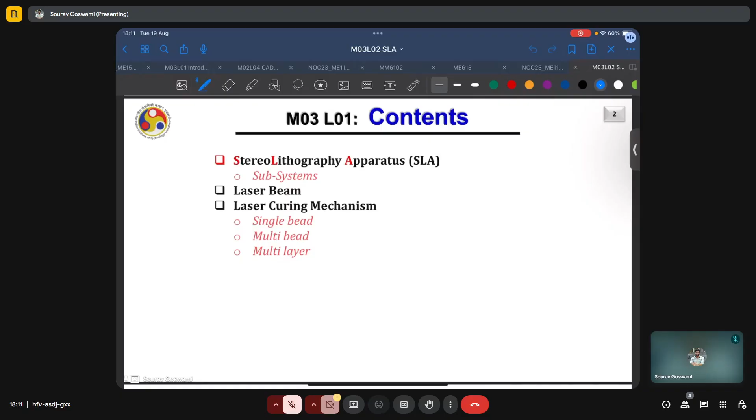The course contents for this week dealt mostly with stereolithography, and in particular with the subsystems of the stereolithography apparatus, on laser beams, lasing mechanisms, and on the mechanism by which such a laser beam cures the resin, which is the liquid feedstock used in stereolithography or SLA systems. We looked at the working principles of single bead curing, multi bead curing, and were very briefly introduced to multi layer curing.

Over the past few weeks, we have been discussing the fundamentals of additive manufacturing. We looked at the definition of the process, what are some of the typical processes, and the categories into which all such additive processes have been classified.

We looked at some basic computer-aided process planning steps, which concern the pre-processing part, while we are still at our computer working on our design. If we have a design, we make it suitable for printing by tessellating it, and we find and check for any necessary support structures which may have to be generated along with the build material.

We saw how a 3D model is divided into various slices, and how by the intersection of the tessellated object with these slicing layers, the contours are generated and how these contours are filled. We also looked at some of the considerations and strategies to fill these contours.

Now, for I think the remainder of the course, we will actually be dealing with actual 3D printing processes which are already commercialized and put to use for commercial manufacturing as well as R&D purposes.

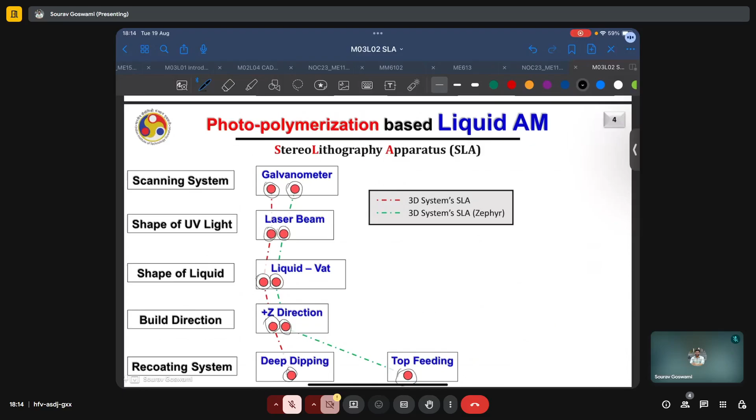Professor Kapil already described this in a video explaining the working of a 3D Systems SLA machine.

Just like any other AM process, with SLA also, the three major blocks of steps are pre-processing, the actual building process, and post-processing.

As I was describing, in the pre-processing step we make our 3D CAD model ingestible by the 3D printing machine. We can slice it directly or indirectly, and we tessellate it with some chosen shape.

We check whether support structures are needed, and if so, where. We choose the material for the support structure in case there is an option to have multiple materials being printed in the same print. If not, we specify the density, the infill structure, or any other distinguishing mechanism, even the color, for the support structure.

Then typically in commercial systems and in SLA, we perform planar slicing. During our discussions, we also looked at some more exotic varieties of slicing, mostly conformal or non-planar slicing, but it's not commonly encountered in SLA systems or DED, in which I work.

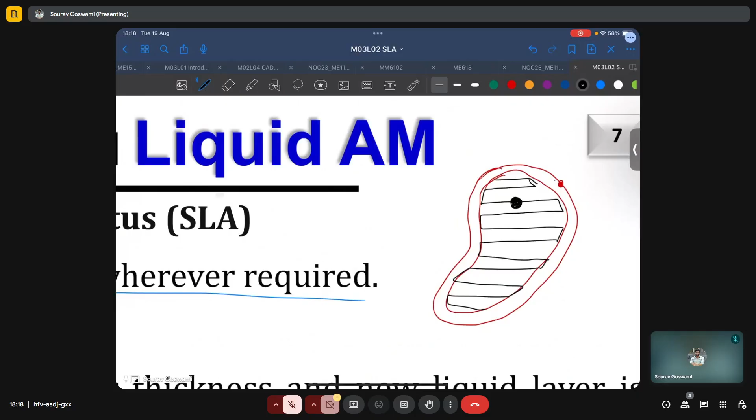After all the layers are made, the table will rise completely, revealing the part. So this layer by layer printing process occurs iteratively. The contours in each layer may be different. In the case of complex geometries, or for very simple prismatic geometries, they may be the same.

However, once all such layers are printed, the table will then rise to reveal the part and allow the liquid to be drained. Once all the liquid has been drained, the built part will be removed from the table.

This removal process, depending on the type of process you're working with, if it is FDM, it can just be removed by hand or by some knife, which is used to separate the printed part from the build plate. Or say if it's a metal part which has been printed using powder bed fusion, then it will need to be separated, say by a wire EDM process, or by some kind of abrasive grinding process.

And further, the support structures have to be carefully removed. Why do we have to take care removing the support structure when we know that the support is a sacrificial material? That is because while the support is indeed sacrificial, our built part is not. And since the support structure is connected to the build part, there may be cases when the support does not really project onto the build plate itself, but from one surface of the build to the other surface of the build.

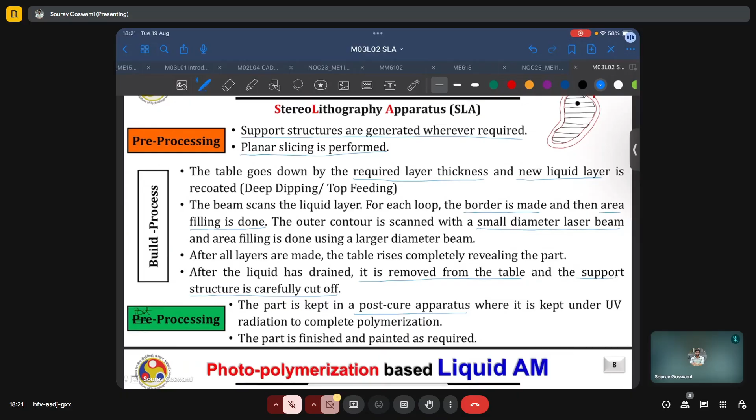Now, in the post processing step, the part is kept in a post cure apparatus, typically something like a UV chamber, where it is kept under UV radiation for complete polymerization. This can take anywhere from say 30 minutes to a couple of hours, depending on the build size, the intensity of the laser, and other factors. And finally, once the part finishes curing, it is finished, taken out, and may even be further painted if required.

Here we have a brief summary of some of the advantages and limitations of the stereolithography process.

It is among the fastest and most accurate of all processes. The reason for the great speeds are because of the tiny moving parts, including the scanning system, which is made up of galvanometers. Galvanometers, as we are aware, consist of a pair of light mirrors which are mounted onto motors. And because of the very low inertia of these mirrors, the motors are able to rotate very quickly and scan the print area with the laser beam at great speeds, typically at the order of 10 meters per second.

Or even more. And it is accurate for a couple of reasons. One is because of the fine size of the laser spot which is used in this process. Second, because since it was the first 3D printing system to be commercialized and developed, a lot of research and a lot of effort have gone into perfecting this process. And thus, for most available resins, we already have a set of well researched and well tested optimum operating parameters and strategies, the combination of which leads to very good parts with great accuracy and tolerances.

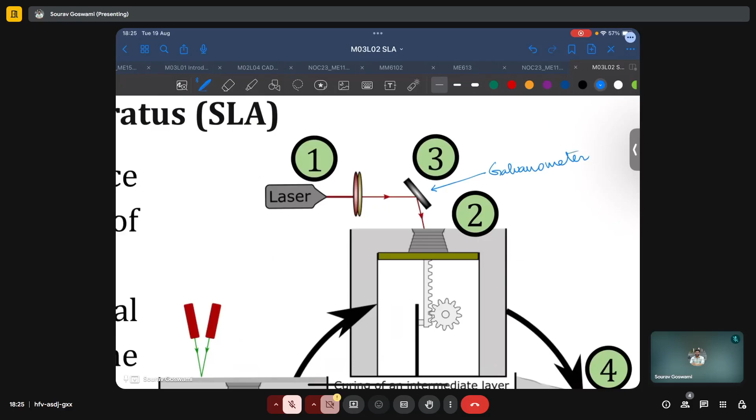So this is just one galvanometer, but as we'll see maybe in the next session, there's actually a pair of them. Galvanometers have a very low inertia, which accounts for the very high speeds.

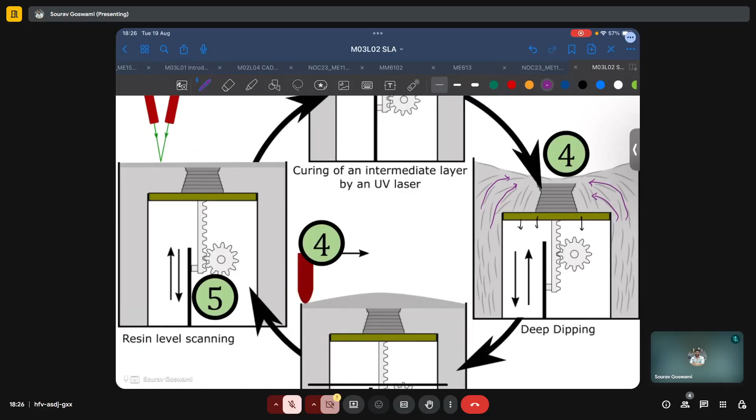It may also be seen to bulge on top of the part, and to ensure that there is only a uniform layer of required thickness on top, we use something called a Doctor Blade to scrape off the excess material, leaving only the required height or required layer of resin on top. Then this process continues, and the next layer is scanned, and so on.

Professor Kapil also discussed some basics of the lasing process. Laser, as we are aware, stands for light amplification by stimulated emission of radiation. Light is any electromagnetic radiation which has the dual nature of waves and particles, and if you're talking about the particle nature of light, then the quantized light particle is called a photon.

All types of electromagnetic radiation travel at the same speed in vacuum, but where they differ is in the frequency and wavelength of radiation. And because of this difference in wavelength, all different types of electromagnetic radiations interact with materials differently.

If I have to give an example from additive manufacturing, we know that for ceramics the suitable wavelength is often of the order of 10 micrometers or so for laser. Typically this will be of the CO2 laser type. For say regular Fe, Ni or Ti based alloys, lasers with wavelength of the order of 1 micrometer, some 976 nanometer or so, are suitable.

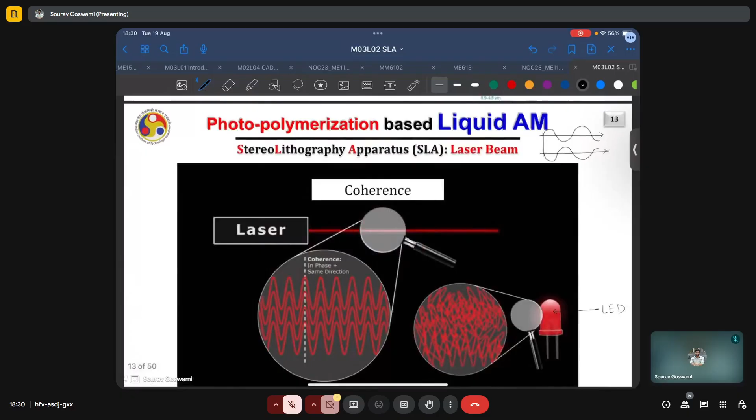So to summarize again, laser has the property of being coherent and being monochromatic.

We'll not talk about the mechanism of laser generation. Professor Kapil has already discussed it. Sorry about that. Yeah.

But we'll take a minute to discuss these transverse electromagnetic modes. There are two modes of the laser beam, one being the longitudinal, which we are familiar with from the analysis of vibration, where we describe the modes of vibration of any string or rod or similar example, and second, we have the transverse mode.

The longitudinal and transverse modes are independent of each other, because this longitudinal length L of a resonator will typically be much larger than the transverse dimension. We can have various transverse electromagnetic modes, which essentially describe the shape of energy distribution in the beam cross section.

This is denoted by the subscripts x and y. X denotes the number of non-illuminated regions along the x-axis, and y does the same for the y-axis.

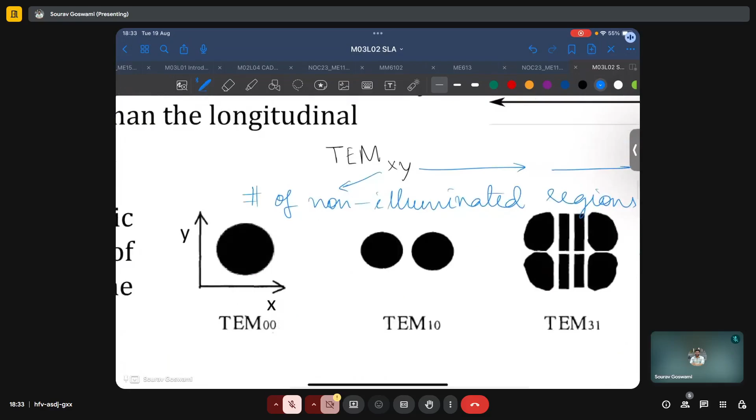If we have a TEM10 type of mode, then we can see that along the x direction there is this one region of non-illumination.

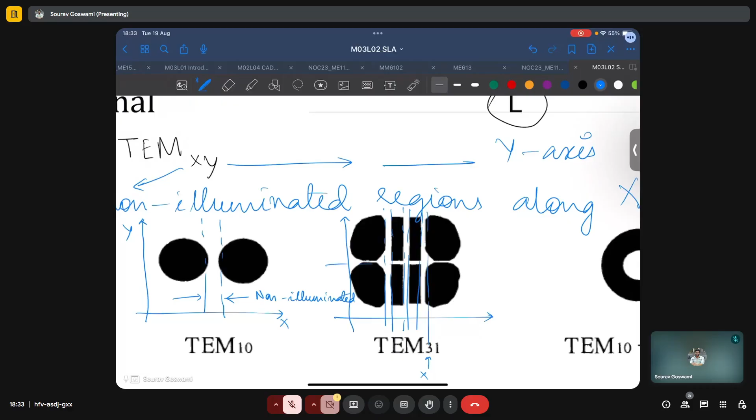Similarly, for the case of TEM31, we can observe that along the x axis there are three regions which are non-illuminated, and along the y direction there is one region which is not illuminated, leading to this beam shape.

And of course we can combine any number of them to come up with new beam shapes depending on the end application, such as a ring or donut shaped laser beam, which is made from a combination of TEM10 and TEM01.

Similarly, we can combine different modes to come up with a top hat ring, as we have here, and other shapes. The parts printed by these different laser profiles can have very different properties.

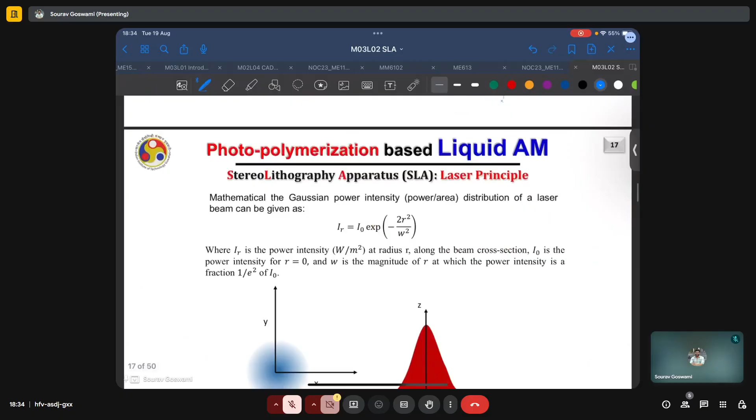However, what we're interested in is how this laser energy is distributed, and how when this laser shines over a layer of liquid resin, it will interact with the resin and lead to curing of the part.

One of the most commonly encountered representations of laser power intensity is the Gaussian intensity distribution. At any radial distance r, the intensity IR equals I naught into e power minus 2r squared by w squared.

Here IR is the power intensity at a radial distance r, with units of watt per meter square. I naught is the power intensity at the very center, that is at r equal to 0. And W is the value of r at which the power intensity drops to 1 by e square of I naught.

Another name for this Gaussian distribution is the bell curve distribution, so some of you might be more familiar with that, or the normal distribution.

To calculate the total power contained within the Gaussian beam, we can do a simple integration step. Starting with a ring of laser at a particular radial distance r, with thickness dr, we can find the power in the strip to be IR times 2 pi r dr, where 2 pi r dr is the area of this ring.

So this is just the area of this ring. To find the total power, we can integrate this elemental power starting from r equal to 0 going till the end of this radial distance. But what is that limit? As we know, for a bell curve distribution, while visually it might appear that the distribution is ending at some finite distance, what we know is that essentially this distribution extends till infinity in both directions. And so the limit of this integral also goes from 0 to infinity because the laser ray is actually spreading out till infinity.

And thus we can come up with an expression for the intensity at a radial distance of r given by I(r) equals 2P by pi w squared, e to the power minus 2r squared by w squared.

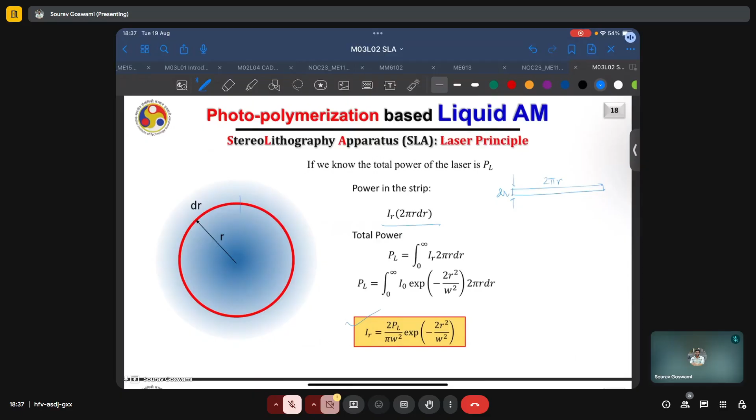The laser beam after coming out of the lasing cavity is highly collimated. Collimated as in it is parallel, it is neither converging nor diverging, and its diameter does not really change much. However, that is for the very ideal case. In the more practical setting, the laser beam will diverge to a very small extent, and this slight divergence in the laser beam is captured by the beam quality parameter BPP. It is quantified in the units of mrad, and there's a unit definition.

So a 1 millimeter diameter beam will have a diameter of 1 meter after traveling a distance of 1 kilometer. Then its divergence is quantified as 1 mrad. However, there might be systems where the beam is further focused using other focusing lenses such as f-theta lenses, as we'll also encounter in our discussions, and then the scenario will of course be different.

There's the concept of waist radius. So during 3D printing, when we say that we are focusing our laser at a particular height, whether that is on the substrate or some pre-deposited layer or at some specified distance, it's never really this set of rays coming and closing in on a point, joining at some point. What actually happens is the laser beams will converge and diverge, and this minimum thickness of the laser beam is referred to as the waist.

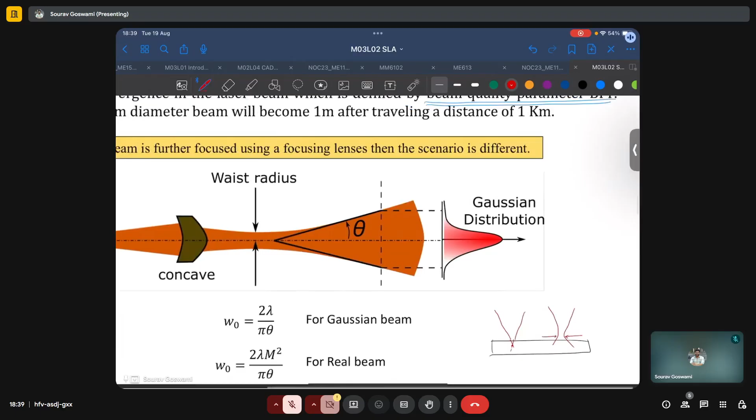It is quantified in terms of the waist radius. For an ideally Gaussian beam, the waist radius is equal to 2 lambda by pi theta, where theta is the divergence angle as shown in the figure here. For a real beam, however, it will further be multiplied by a factor of m squared to account for the beam quality.

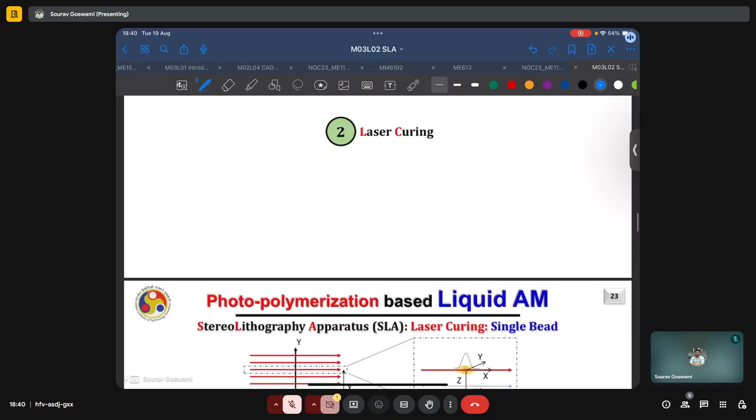So, some numerical examples were already discussed by Professor Kapil in class. We'll also discuss a few numerical examples of our own, which will be useful for solving the assignment problems.

Next, we talk about the mathematics of the stereolithographic process, and we'll be dealing with a lot of equations here. However, they are well derived and well described by Professor Kapil, so we should not run into any issues. We'll just briefly recall some of the few important ones, which will be useful for our problem solving exercise later on today.

So, say we are scanning a region, and for one particular bead, this bell curve shows the intensity of the laser profile. The directions of the x and y axis are shown. Scanning is happening along the x direction, y is the lateral direction, and the z direction is pointing inwards. So this is a left-handed coordinate system, and we are scanning along a length of 2L from a time t1 to t2.

So the intensity of the laser beam spot in units of watt per meter square on the top surface of the resin, so we have set z equal to 0, can be defined as I equals 2P naught by pi omega naught squared, e to the power minus 2r squared by omega naught squared. Here omega naught is actually the beam radius.

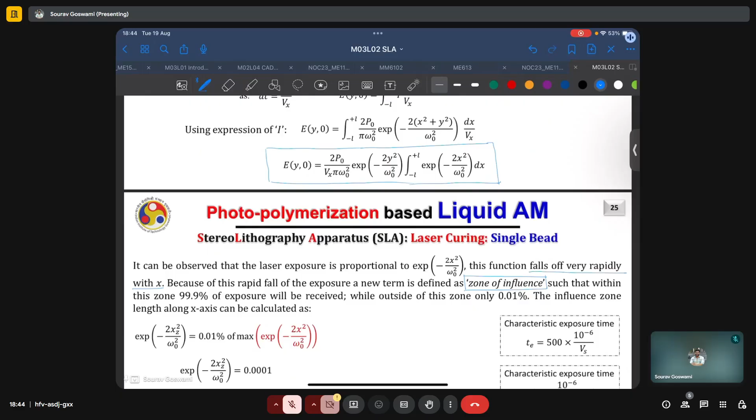a term called the zone of influence is defined. This zone of influence is the zone where 99.9% of the energy exposure will be received. Essentially, almost all the energy of the laser beam is contained within this small zone of influence. For strictly theoretical purposes, it is 99.9%, whereas the remaining 0.1% will be outside the zone of influence.

And thus we can calculate what will be the extent of this zone, and it comes out to be 2.146 omega naught, or 99.9% of all the laser energy will fall within just 2.146 times the beam radius. For an SLA system, a typical beam spot radius length scale can be taken to be 100 micrometers, and thus the limit of the influencing zone can be seen to be from minus 214.6 micrometers to 214.6 micrometers, or approximately just 500 micrometers.

So 99.9% of the energy is contained within this zone only.

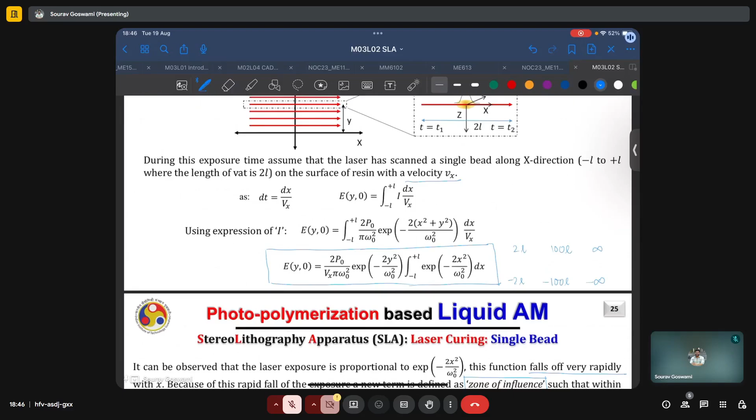And essentially, the reason for doing this exercise is, now that we see that all of the energy is only contained within some 500 microns of a local region, it does not really matter whether we are integrating from minus L to L, or minus 2L to 2L, or minus say 100L to 100L, or minus infinity to infinity, because the amount of error will be very small. And out of this convenience, we simply take the limit of integration from minus infinity to plus infinity, which allows us to come up with a closed form solution for this integration.

And so our equation is suitably modified. Now the energy distribution in the y direction for a given x value and on the surface with z equal to 0 now becomes equal to 2p naught by vx pi omega naught square e power minus 2y square by omega naught square, integral now from minus infinity to plus infinity of e power minus 2x square by omega naught square dx. Recollect that the limit of this integral was earlier from minus L to plus L, because we have defined that the laser is only scanning along this distance.

Now with some further suitable substitutions, this can be simplified to give us the final relationship. The energy distribution in the y direction for a given x and on the surface is equal to under root 2 by pi, p naught by vx omega naught, e power minus 2y square by omega naught square.

But this was just at the surface. What happens inside? Because as we know, for the material to be cured, the laser has to penetrate into the bulk of the material. So when the laser beam strikes the resin surface, some of its energy will get absorbed, some of it will get transmitted, and some of it will get reflected.

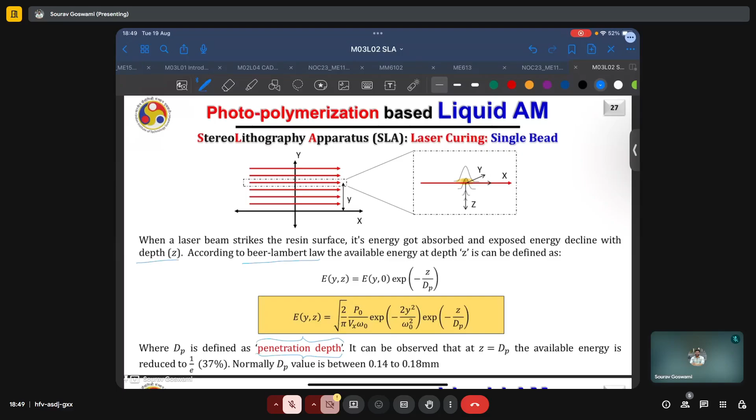How is dp defined? Again, mathematically it is defined as the limit at which the energy intensity decreases to about 1 by e, or 37% of the incident radiation. And we also have some numbers here. So typically this penetration depth value will lie between 0.14 to 0.18 mm, or typically of the order of 0.2 mm.

Thus our final equation, now for the energy distribution at any y and z at a given x, is now under root 2 by pi, p naught by vx into omega naught, e power minus 2y square by omega naught square, e power minus z by dp.

Now some comparison of scales here. Let us say we are working with an SLA process and have some optimized parameters to build parts. But say one day the idea strikes us that we want to save on build time, to build really fast, and our machine has hardware capable of very high scanning speeds. So say you want to increase the scanning speed to 2x, 3x, or even 10x, the rationale being that scanning faster will save print time and build faster. But what is the physical consideration that actually dictates the maximum speed you can take? Or can you just keep increasing the speed monotonically to any arbitrarily high value? Is it only limited by the hardware?

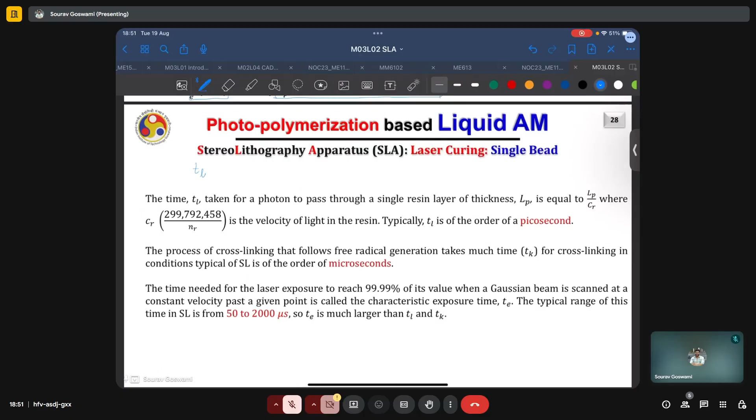For that, here we have some time scales. The first time scale, TL, is the time taken for a single photon to pass through a single resin layer of given thickness LP. This time will equal the layer thickness of resin LP divided by CR, where CR is the velocity of light in this given resin. Its typical order is of picoseconds, 10 to the power minus 12 seconds. This is the amount of time taken by a single photon to pass through a single resin layer of some given thickness.

As we discussed last week, the process of polymerization involves cross-linking that follows free radical generation. The time for this cross-linking process, in conditions typical of stereolithography and for the typical resins used, is typically of the order of microseconds. This is given by Tk, so Tk is of the order of microseconds, or 10 to the power minus 6 seconds.

Now, the time needed for the laser exposure to reach 99.99% of its value when a Gaussian beam is scanned at constant velocity past a given point is called the characteristic exposure time, TE. The typical range of this time in SLA, stereolithography, ranges anywhere from 50 to 2000 microseconds.

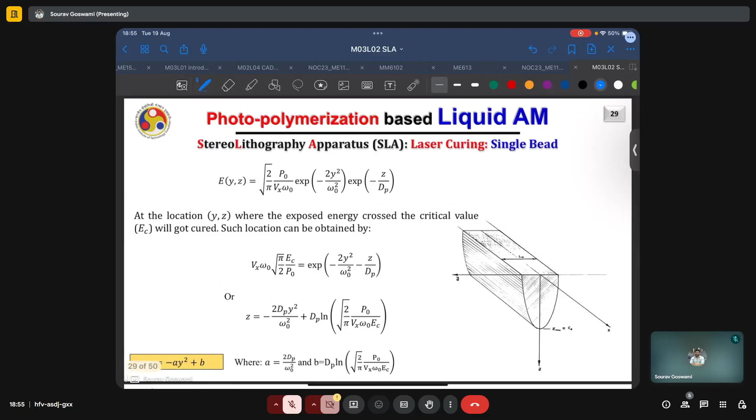How do we get all those locations? The location where the energy intensity is just equal to this critical intensity will give me the perimeter or shape of this cured region, since everywhere inside it the energy intensity will be equal to or more than this critical energy. To do this, we simply equate the expression of the energy with the critical value, and this gives us the expression for z at a given x in terms of y. Z equals minus 2 dp y squared by omega naught squared, plus dp ln under root 2 by pi, p naught by vx omega naught ec. This is of the form z equals minus a y squared plus b.

As we are aware, this is the equation of a parabola. If our leading coefficient were positive, this parabola would be convex downwards... for a negative leading coefficient, it will be convex upwards for a z direction pointing upwards. In our case the z direction itself points downwards, and so our parabola looks like this, which is the expected shape of a cured bead.

Further, the maximum exposure, which happens right below the center point, corresponding to the deepest location of the cured bead, or in some other processes, corresponding to the deepest location of the melt pool, can be given by Emax equals under root 2 by pi, p naught by Vx omega naught.

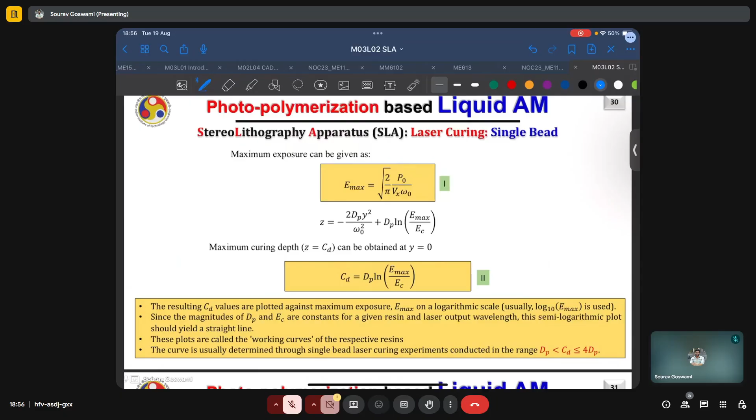And the maximum curing depth at this maximum exposure can be obtained at y equal to 0, as we just saw. At this point, we have both x and y equal to 0. Sorry, at some particular x, we have y equal to 0. And if we just substitute that in our equation for the depth, this maximum depth can be obtained as CD, maximum curing depth, equals penetration depth into ln of Emax by Ec.

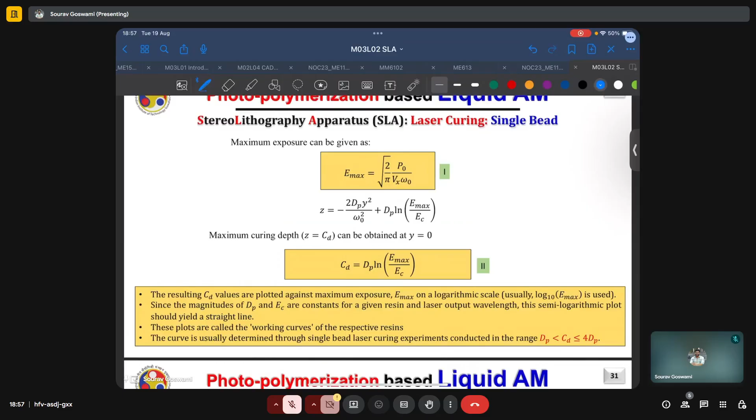Here are a few important observations about these things. The resulting curing depth values are plotted against the maximum exposure Emax values on a logarithmic scale, typically log 10 Emax. Since the magnitudes of dp and Ec are constant for a given resin and for a given wavelength of laser, this semi-logarithmic plot should yield a straight line.

And these straight line curves for various parameter combinations are called working curves and are typically used or referred to directly when working with an SLA system instead of calculating them always by ourselves. So for the given standard resins that you use and for the wavelength of your system, you will be provided with a booklet containing these working curves, which you can refer to when trying to print a part.

And this curve is usually experimentally determined through single bead laser curing experiments conducted in the range dp less than CD less than or equal to 4 dp. The reason for this is because in this region, the Emax versus CD curve is a straight line and shows linear behavior. Beyond this region, it can have a super logarithmic or sub logarithmic behavior, as we'll just see now.

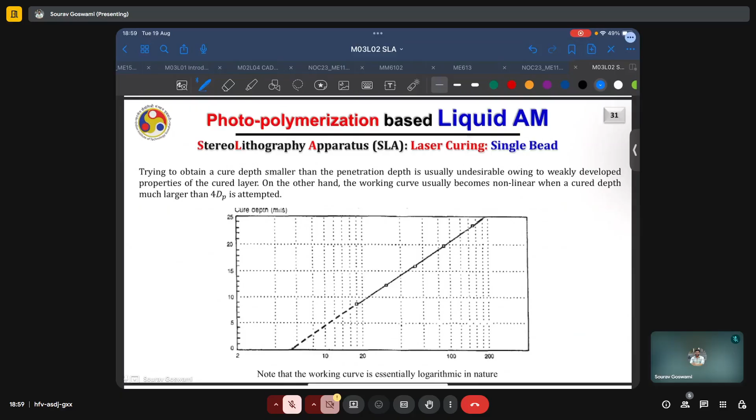An example curve is shown on the right here, which shows super logarithmic behavior. If we were to just extrapolate this curve, we would have expected this straight line nature to continue, but instead we see that the slope has become much steeper. Since the plot is already semi-logarithmic, and this given curve is now even steeper than a logarithmic curve, its behavior is called super logarithmic.

And there are two possible mechanisms which have been proposed in the literature to explain such a behavior. One is optical bleaching, and the second is optical self-focusing.

What happens in optical bleaching? The partially solidified part may become transparent for the laser, and hence, because of this transparency, it is now allowing a greater penetration of the laser into the system. As we know, typically it would have been controlled by Beer-Lambert's law, but now that it has become transparent to the incident laser radiation, the laser can now penetrate to a far greater depth.

But what is this depth? It is just the slope of this working curve, and if this depth increases, there will be an increase in positive curvature of the working curve, and we'll observe this super logarithmic behavior.

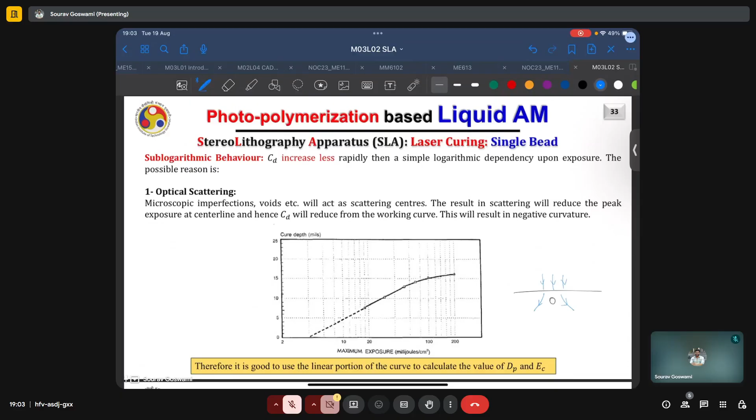So, say in your layer of resin you have a void or an air bubble or any other such microscopic imperfection, which is now scattering the incident radiation away from the center. The resultant scattering will then reduce the peak exposure at the center line, thereby reducing CD, and this will result in a decrease in curvature or sublogarithmic behavior.

Now we already saw the expressions for the maximum exposure and the maximum depth of penetration. What about the width? The maximum width can be obtained at z equal to 0, and this is given by Cw equals omega naught into under root 2 CD by dP.

A few observations about the maximum width of the bead. It is directly proportional to the laser spot diameter, so larger the laser spot, larger the bead width. It is proportional to the square root of the ratio of the cure depth to the resin penetration depth.

And again, if you are working within the linear portion of the curve, we can obtain some bound on this maximum width. In the linear portion of the curve, where CD is between dP and 4 dP, the maximum width will also lie within under root 1 by 2 times twice omega naught to less than root 2 times twice omega naught. Just to recollect, omega naught being the waist radius of the laser beam.

Further, we can come up with expressions for the laser scanning velocity itself in terms of the other parameters. Vx is equal to under root 2 by pi, p naught by omega naught, 1 by e critical, e power minus CD by dP.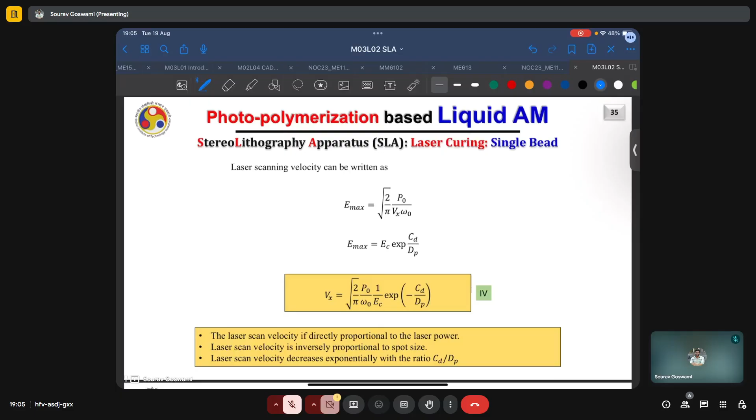Physically what it means is, if you are looking at the top view, or the cross section, if this is one cured bead and this is the center, then the distance from this to the next center line is actually the step over, and typically we take it as some multiple of the laser spot radius.

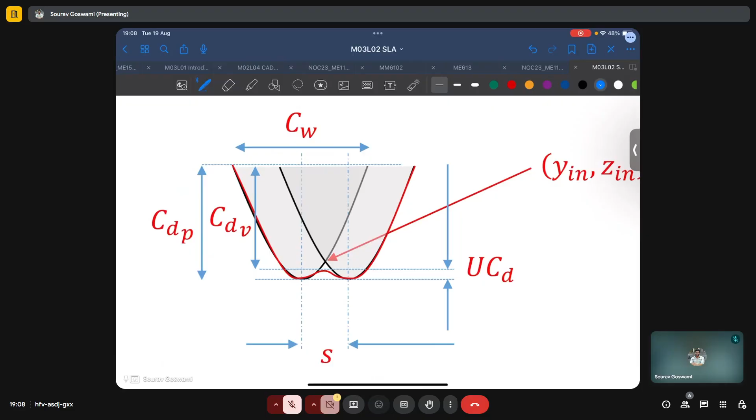Now let us extrapolate our learnings from curing of a single bead to the curing of multi-beads. Here, the primary difference is that the behavior for single beads remains the same. What we are doing is we are just superimposing two single beads with some overlap to predict the characteristics of a multi-bead print. And here what we'll see is that there are regions of maximum curing depth here and here. These are also referred to as hill features.

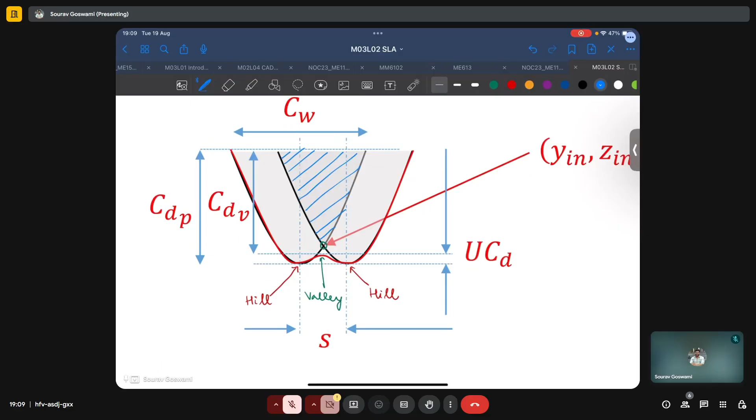And then we have this region of minimum curing depth, which is called a valley. Notice that just by plotting two single cured beads, we'd expect the minimum to be located somewhere here. But because of the superimposition of energy in this region, denoted by these dashed lines, it actually shifts down, and thus we have these hill and valley features forming. The difference between the depth of the valley and the depth of the hill is called undercuring depth, or UCD.

So the overlapping region will have the maximum exposure at Y in, shown by the green point here. Now assume that the maximum exposure in the hill is EH and the maximum exposure in the valley region is EV. Therefore, the undercuring depth is given by CdP minus CdV, as we just saw, equals dP ln(EH/EV).

What is the tolerable limit for such an undercuring depth? Because when we are printing, we want our part to ideally have sharp features, so we would want this bottom to be exactly flat. But now we are seeing that because of multiple passes, what we can realistically expect is some wavy feature. But how much waviness can we tolerate?

Typically, the difference between the depth at the hill and depth at the valley should be less than 5 micrometers for an SLA process. And if it is indeed less than 5 micrometers, the condition is referred to as planar curing. For some assumed value of the depth of penetration, say 10 to the power minus 5 meters, the ratio of exposure in the hill to exposure in the valley can be worked out to be less than or equal to 1.034 for planar curing.

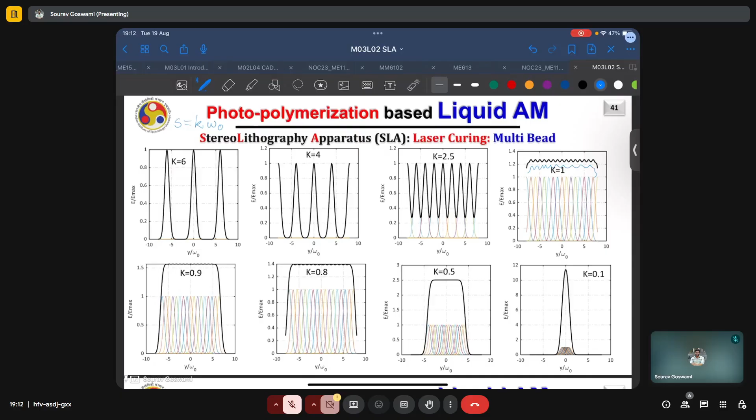At k equal to 0.9, it becomes almost planar. At k equal to 0.5, it is very plain but also very narrow. And at k equal to 0.1, it has a very sharp peak.

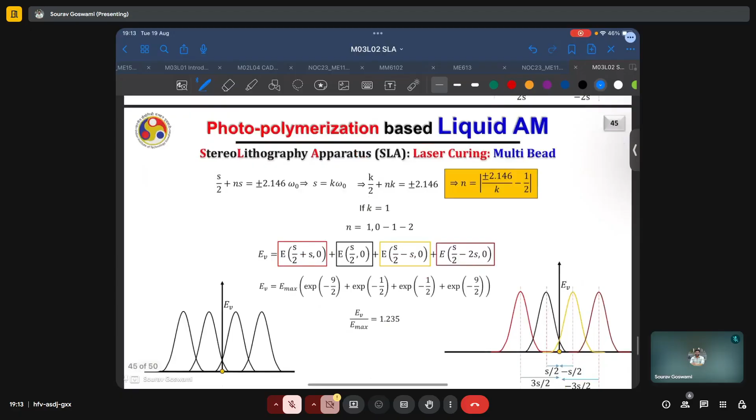Now we can also have some other useful expressions. Here again, the zone of influence is discussed in the y direction. When we are trying to work out the condition for planar curing, we only want to check within this zone of influence. This can be calculated by checking at only some integral multiples of k, as shown here. This will become more clear when you solve an example and check for the planar curing condition.

And we'll also just briefly touch upon a multi-layer, multi-bead print. So typically, whenever we are trying to optimize our parameters for a new material, or a new material and process combination, we start with a single bead. Often you will find a very healthy amount of literature just on these single bead experiments, with lots of insights still coming in making us aware of complex physics.

Then we progress on to, say, single layer multi-bead, as in now you have multiple beads but we are still working in the same layer. Then we can finally move on to multi-layer multi-bead, and this is the same thing which we're doing right now.

So ideally, we would like to have uniform curing throughout our current layer so that we can have perfectly flat layers of resin being printed in each step. However, this is not possible in practice owing to the exponentially decreasing irradiation throughout the laser depth because of Beer-Lambert law. Hence, the laser power and layer thickness are so adjusted as to result in a cure depth which is just slightly greater than the thickness. This is called overcure.

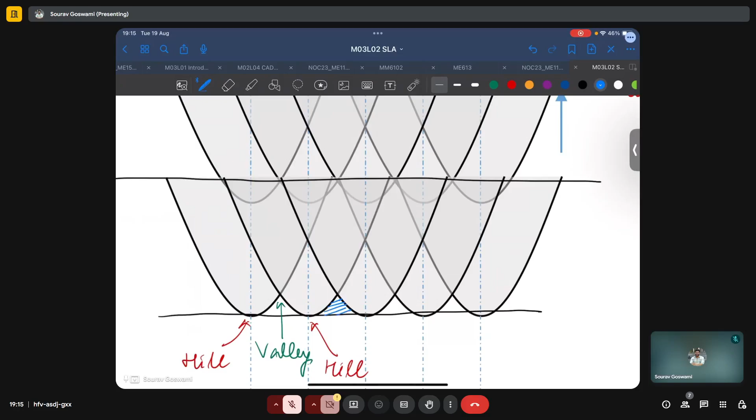So what happens is, we already saw that for some layer there will be these hill and valley features, and the valley region can be somewhat vulnerable to underexposure, as here the curing might not be as much as desired. How do we take care of this? For the next layer that we print, we ensure that it does not lie fully above the current layer—there is some overlap.

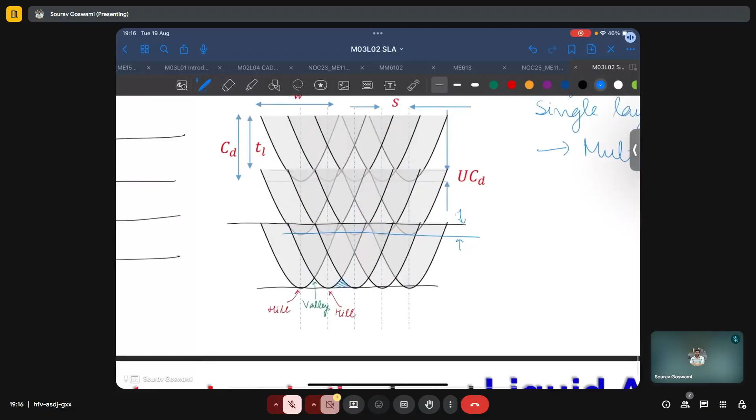Now what happens is, the previously susceptible region is now getting printed in a region which is already cured, and we repeat this exercise successively to build a strong part with good mechanical properties.

A similar analog in metal printing is the concept of dilution, where, starting from principles of metal cladding, when depositing a material on a substrate, we do not want all of it deposited just on top. We want some deposited on top, and some to also go below the substrate in order to bond well with it.

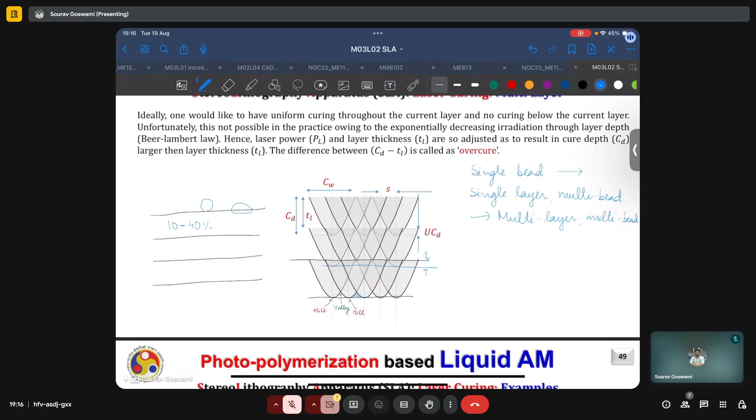Typically, a dilution ratio of 10 to 40% is recommended and necessary for good mechanical properties. This can be computed as the ratio of height of the bead to depth of dilution, or in terms of the areas of the bead and the dilution. Essentially, there must be some influence of the newly deposited material into the previously deposited layer of the substrate for good mechanical properties.

Now we have discussed all the important formulas and concepts required for problem solving. Let us take a short break, and when we return, we'll solve some example problems that will further clarify these concepts.

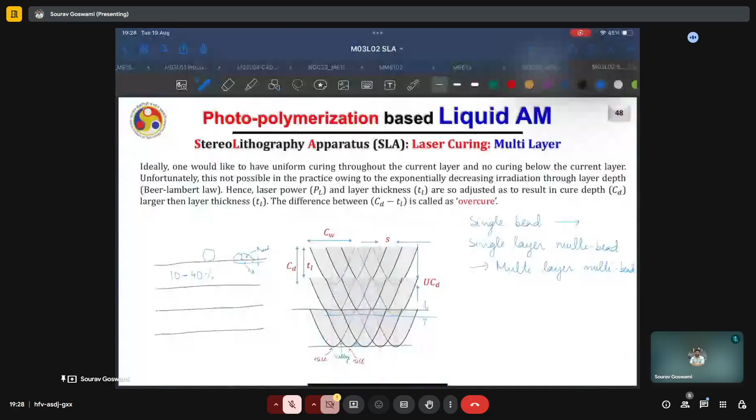As some of you might be aware, it has been raining incessantly in Mumbai, along with a few other regions of the country. The conditions on campus are fine, but in Mumbai city overall, the logistics have been hit really hard. So wherever you are, I hope you and your family are safe.

Let us continue our learning. We have some common data for the next few questions. In an SLA system, resin is used in a vat of size 0.2 by 0.2 by 0.4 meter cube, and there are a few other specifications of the system.

A 1000 milliwatt laser with Gaussian intensity distribution is used to cure the resin. The laser beam reduces its intensity by 1 by E squared at a distance of 200 micrometers from the center of the laser beam. It is desirable to have maximum curing depth be 3 times the penetration depth, and the spacing between two single beads is 2 times the laser beam radius.

We are also supplied with the working curve for this resin and laser combination, which gives us the cure depth versus the exposure.

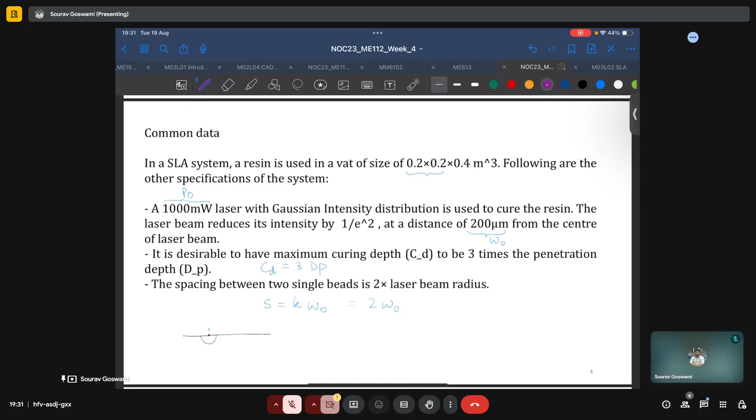Visually what this means is, if we are looking at the cross section, if this is one bead and this is the center, the next bead is located at a radius exactly equal to twice the laser beam radius. Ideally this width of the beam will also be equal to the radius of the laser, so typically they are just touching each other, but that's not really important—it's just for visualization purposes.

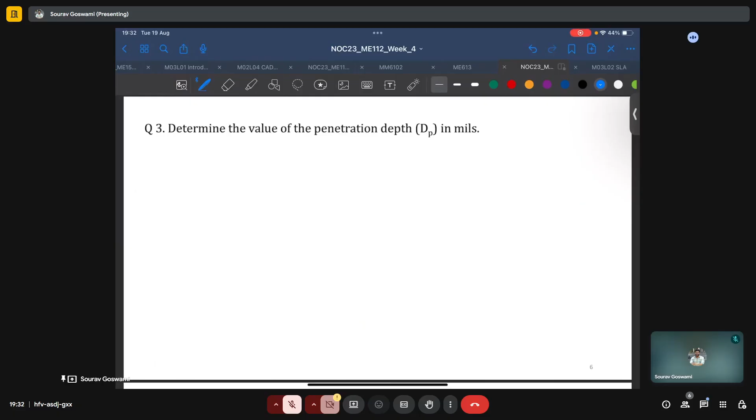We also have the working curve here. So let us now start solving the questions. First, determine the value of the depth of penetration in mils. What we have here is CD versus Emax, maximum exposure. So this is Emax and this is CD.

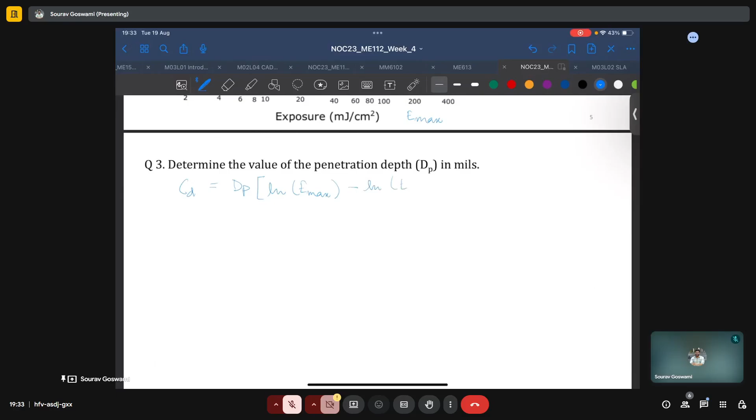We have an expression for dp in terms of CD, already given in the slides: CD is equal to dp times the natural log of Emax minus the natural log of E critical. Here we have a plot of CD versus Emax, so dp and EC will remain unknown. Let's see how we can still solve for it.

Let us take just a few values of this plot near some standard regions. We can take Emax equal to 60, which will correspond to a CD value of 4.8. Another we can take at say 100, which will correspond to a CD value of 6.

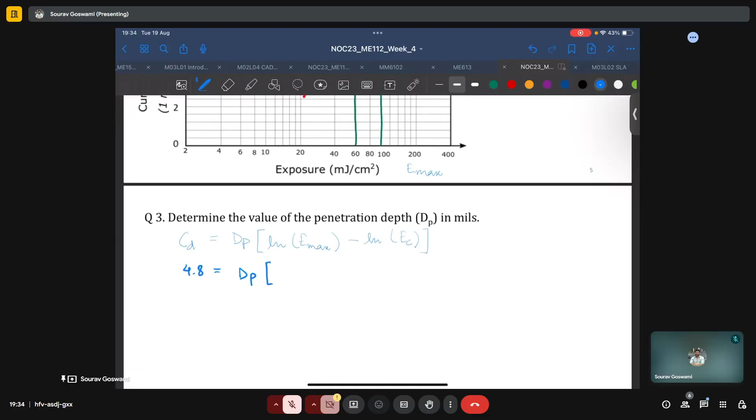Let us plug it into our equation. For the data point 60, 4.8, we have 4.8 equals dp times ln 60 minus ln EC. From the second data point 100, 6, we have 6 equals dp times ln 100 minus ln EC.

Now we see that we have two unknowns, dp and EC, and we have two equations, thus we can easily solve for them. Also, please note that this is just a straight line trend, so we can use any data point along this straight line.

You are free to work with any other data points, and the result will be the same. Say we have equation 1 and 2. If we subtract equation 1 from 2, what we'll end up with is 6 minus 4.8 equals dp times ln 100 minus ln EC minus ln 60 plus ln EC. So which implies that 1.2 equals dp of ln 100 by 60, or 5 by 3, which will give us a dp value of 1.2 by ln 5 by 3.

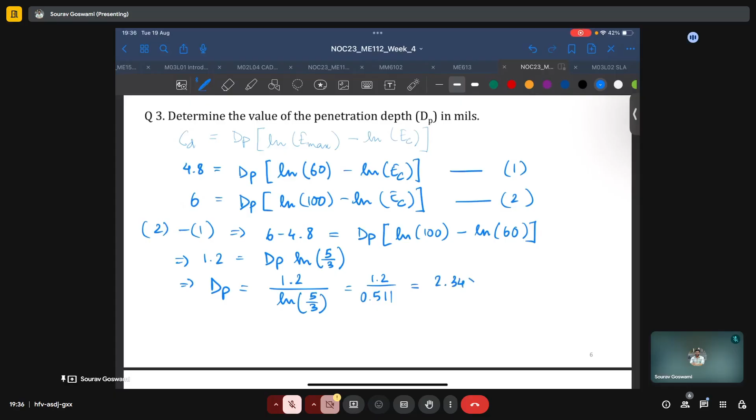Let me just quickly calculate this. This is 1.2 by 0.511, which comes out to be 2.3483, and the unit is mils or milli-inches.

Thus, it was just a straightforward application of the formula already supplied to us. The second question is, determine the value of the critical exposure EC. Now EC was the second variable in the equation that we dealt with already, so we can find its value very easily.

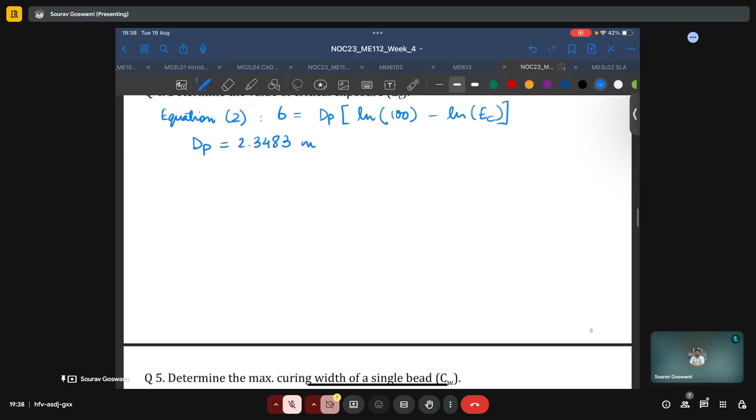Say for instance, using equation 2, which gave us 6 equals dp times ln 100 minus ln EC. Yes, that is correct. And we also found the value of dp, 2.3483 mils. Thus, EC is the only unknown and we can easily solve for it.

Okay, not a lot of space, I have to be careful, which implies that ln of 100 by EC is equal to 6 by 2.3483, which comes out to be 2.5550.

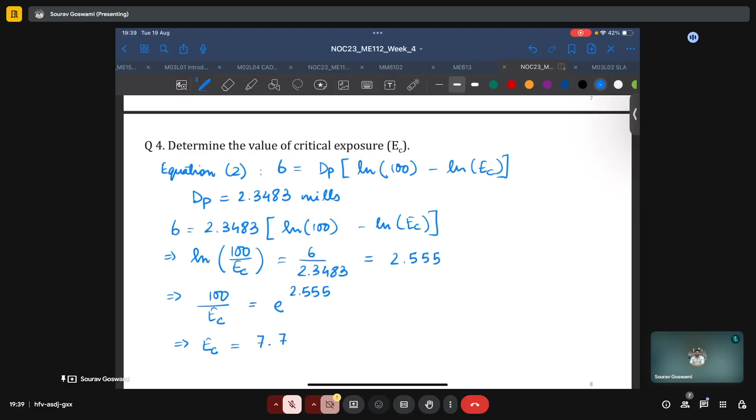Which implies that 100 by EC is equal to e power 2.555, and this EC is equal to 7.7689, or 7.769. The unit for this is millijoule per centimeter square.

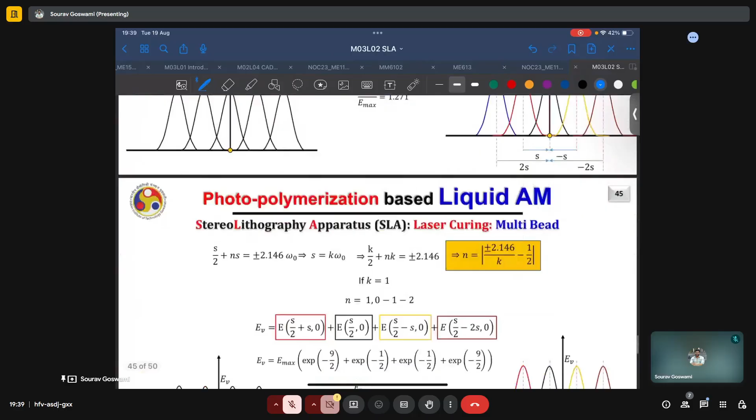The fifth question is asking, determine the max curing width of a single bead, CW. Now please refer to the slide to find the formula for the max curing width, and we'll find that it is equal to omega naught under root 2 CD by dP. So the max curing width CW is equal to omega naught, or W naught, under root 2 CD by dP.

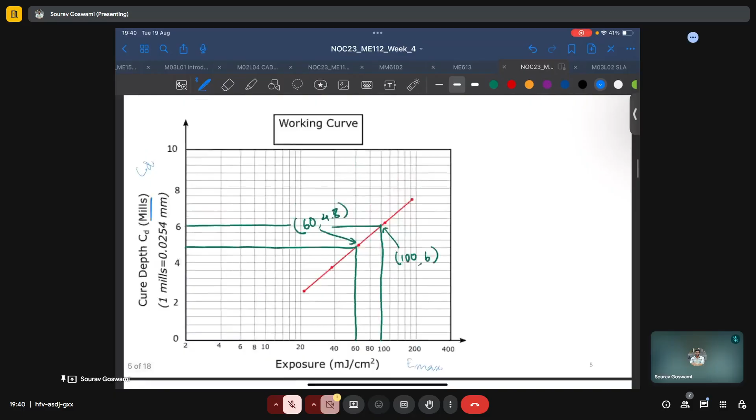Now W naught is already available to us as a given value, it is 200 microns. And we just calculated CD and dP. CD was... okay, no, CD is also given to us as 3 times dP, and we already calculated the value of dP.

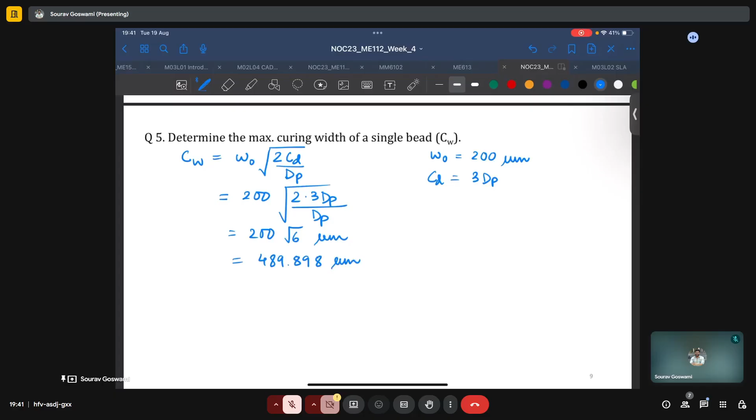So let us substitute this into the equation. So CW is equal to 200 microns times under root twice into 3 dP by dP, which is equal to 200 root 6 micrometers, and this will come out to be 489.8979, so approximately 489.898 micrometers. This is the maximum curing width for a single bead.

Please note that at every stage we are using information or data, values which we have calculated at the previous step. So if during your certification examination or for an assignment you are given such a multi-part question where the values for one question depend on the values obtained in the previous question, it will be very critical that we are careful and we obtain accurate values, because otherwise it will lead to a cascading error where the error in the determination of one value will ensure that all further values we calculate are also erroneous.

Okay, I think this question got repeated somewhere. Determine the scanning velocity Vx in meter per second. Now recollect again that the formula for the scanning velocity was also supplied to us.

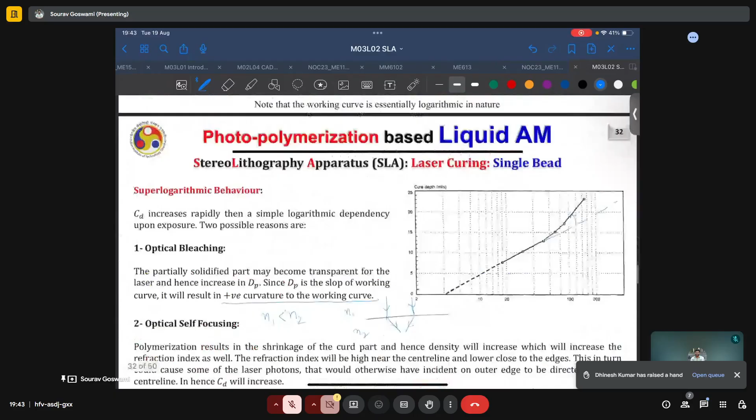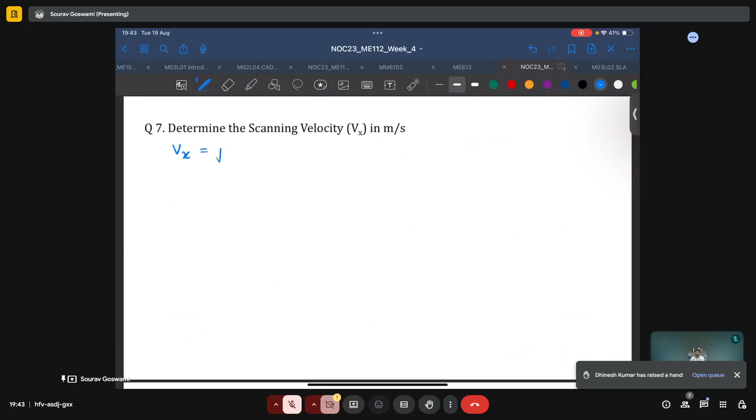Okay, it is right here, equation 4, which is Vx equals under root 2 by pi, P naught by omega naught, 1 by EC, e power minus CD by dP. So let us use this formula: Vx equals under root 2 by pi, P naught by omega naught, 1 by EC, e power minus CD by dP.

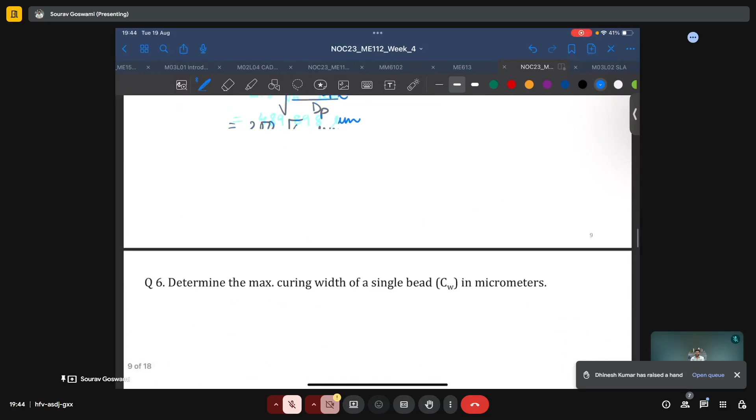Now notice that all of the values are available to us. P naught is already supplied in the question, it is equal to 1000 milliwatts or just 1 watt. Omega naught is also supplied to us, it is 200 micrometers, or 200 into 10 power minus 6 meters.

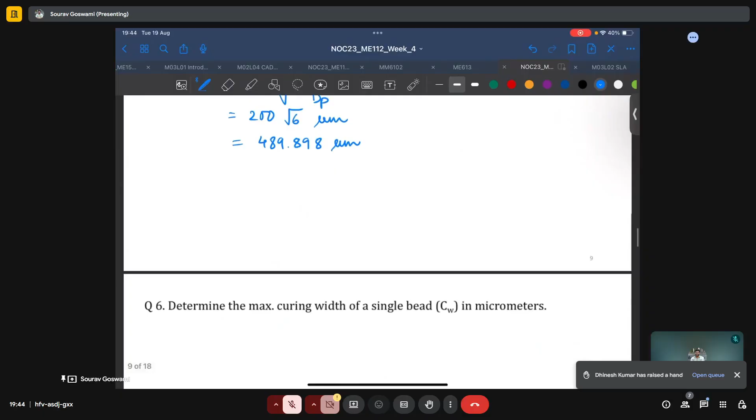We found the critical exposure energy, which came out to be 7.769 millijoule per centimeter square. And just like the others, we'll also convert this to SI units, so this will be into 10 power minus 3, 10 power minus 4, so 77.69 joule per meter square. Cd is given to us as a multiple of dP, and it is equal to 3 dP.

So let us plug in these values and try to find the scanning velocity as a function of all these other parameters. This will come out to be under root 2 by pi, 1 by 200 into 10 power minus 6 or 2 into 10 power minus 4, into 1 by 77.69, exponential of minus 3dP by dP.

Let us calculate these term wise. So the root of 2 by pi is 0.7979, into 0.5 into 10 power 4 or 5000, into 1 by 77.69, into e power minus 3, is 0.0498.

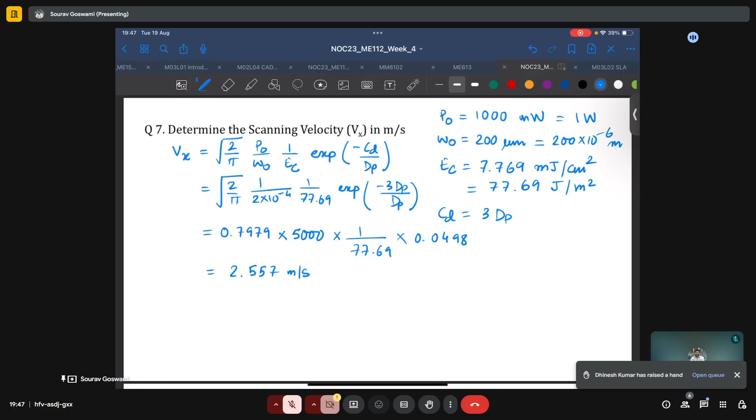Now let us try to rationalize whether this value of the obtained scanning velocity is within reasonable limits or not. As we discussed and as Professor Kapil mentioned during the lecture, the typical order of scanning velocity in SLA like processes is of the order of say 10 meter per second. It can of course be higher, but this is a typical order, and the value which we have is 2.56 meter per second, which is indeed of a similar order. So definitely this sounds right.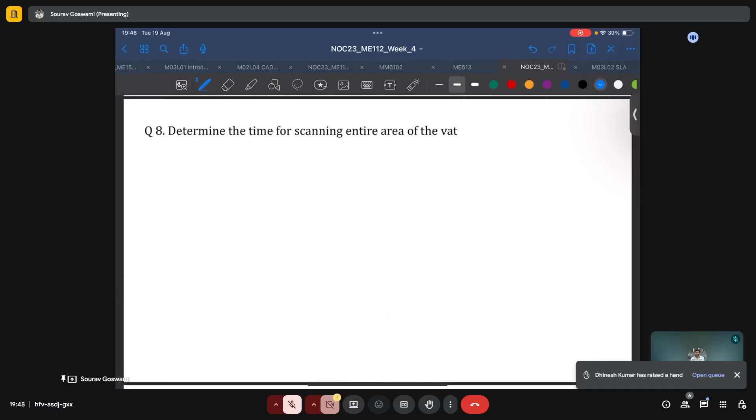Now that we have the velocity, let us also try to find the time taken for scanning the entire area of the vat. And again, such a formula was already derived for us. Here it is: T equals A by K into under root pi by 2, EC by P naught, e power CD by dP. What is A here? A, again please recollect, is the area to be scanned, and K is the multiple of laser radius, which defines the step over distance.

S is equal to K omega naught. So let us use this formula: T equals A by K, under root 2 by pi, sorry, pi by 2, EC by P naught, e power CD by dP.

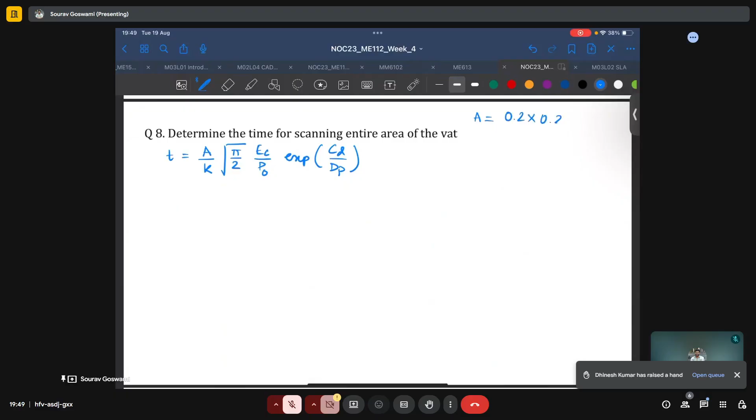Again, the values are available with us. A equals 0.2 into 0.2 meter square, K equals 2, EC equals 77.69 joule per meter square. P naught, if I recollect, was 1000 milliwatt, or just 1 watt, and CD was equal to 3 dP.

So let us just plug in these values into the given formula and find the time taken for scanning the entire area of the vat. This is equal to 0.04 by 2, under root pi by 2, 77.69 by 1, exponential of 3dP by dP.

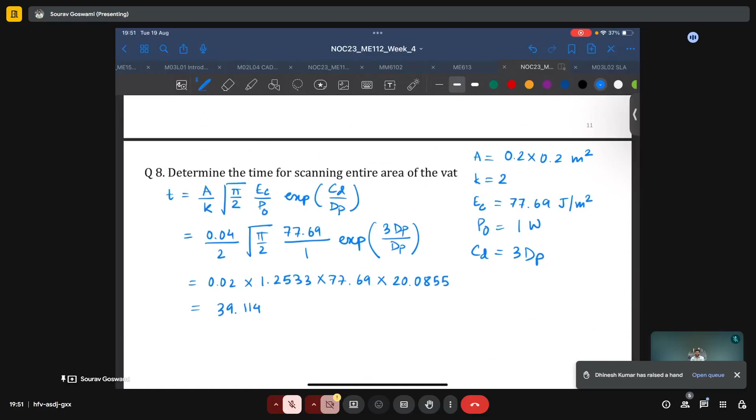And if we write this term by term, this will be 0.02 into 1.2533 into 77.69 into e power 3, which is 20.0855. And if we multiply this out, this comes out to be 39.114 seconds. Again, this is a reasonable amount of time given the scanning speed, which was close to 2.56 meter per second, and for a scanning area of 0.2 into 0.2 meter square.

Finally, we are asked to find—okay, not finally, there's one more question. We are asked to find the ratio of exposure in the hills and the valleys. And here we will make use of the concept of zones of influence. So first we must find the zones of influence in the hills.

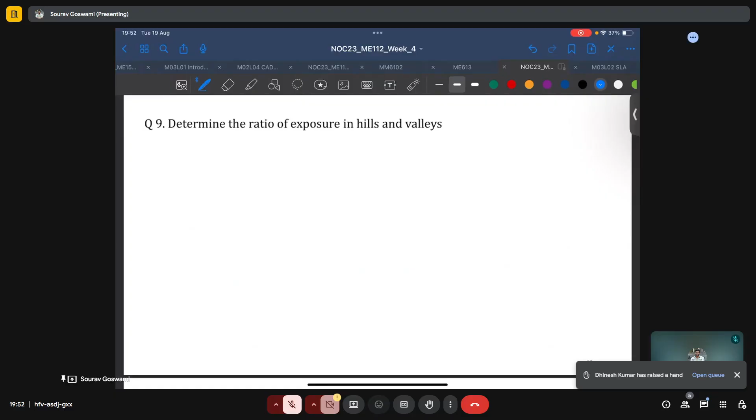For hills, this can be found as n equals plus minus 2.146 by k. Again, I'm just directly using the formula provided by Professor Kapil in his slides. So plus minus 2.146, the value of k is 2, so this is equal to plus minus 1.073.

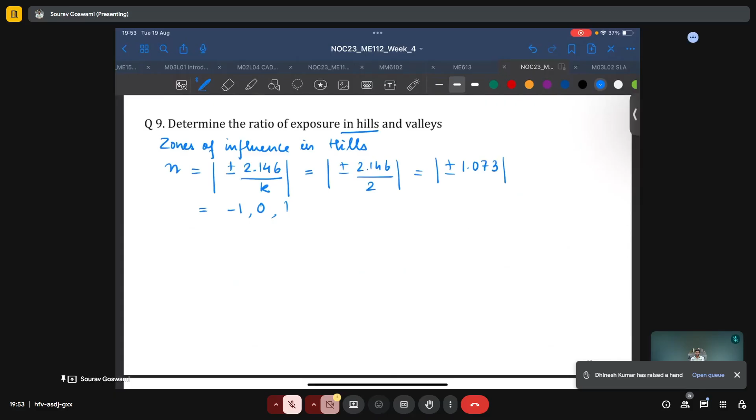And we are only taking integral values in this range, so n will come out to be -1, 0, and 1. Thus, if we are to find the cumulative effect of the superimposed energy intensities in the hills, the energy exposure at the hills is equal to the energy at -s,0 plus energy at 0,0 plus energy at s,0, corresponding to the three values of n: -1, 0, and 1.

And we know that, say, at any given x on the surface, so z equal to 0, E may be obtained as some E max times exponential minus 2y square by omega naught square.

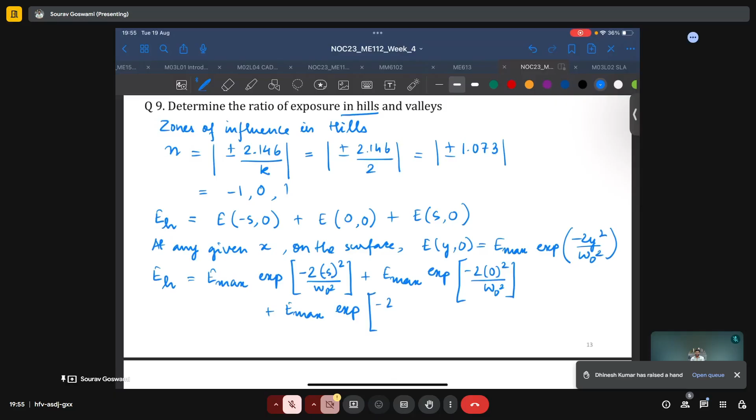And so we can find EH equals E max times exponential minus 2, minus s square by omega naught square, plus E max times exponential minus 2, 0 square by omega naught square, plus E max times exponential minus 2, s square by omega naught square.

And we take E max common from all of these, and note that omega naught is just a multiple of s, so s is equal to k omega naught. Then this becomes exp minus 2 k square omega naught square by omega naught square plus exponential 0 plus exponential minus 2 k square omega naught square by omega naught square.

And this becomes E max times exponential of, the value of k was also available with us, it is equal to 2. So minus 2 into 2 square is minus 8, plus exponential 0, which is just 1, plus exponential minus 8, and this will be 2 into e power minus 8 plus 1. This is 1.00067 Emax.

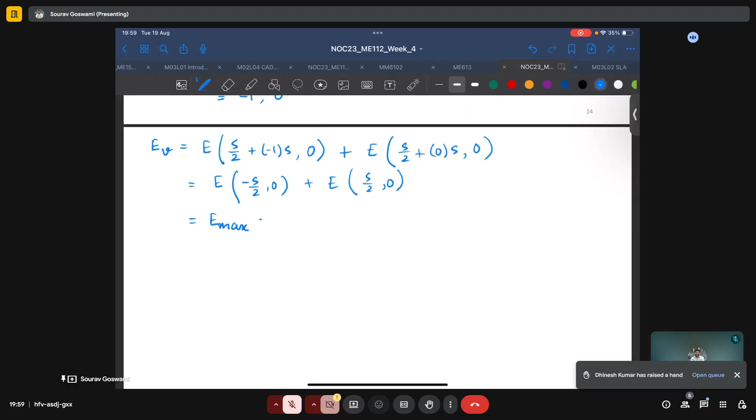We just substitute it here. This is equal to E max times exponential minus 2, minus s by 2 square by omega naught square, plus E max times exponential minus 2, s by 2 square by omega naught square, which is simply equal to twice E max exponential minus 2, s square by 4 omega naught square.

But s is equal to twice omega naught, as you already know. So this comes out to be twice E max exponential minus 2 into 4 omega naught square by 4 omega naught square. So this is simply twice E max into e power minus 2, or 0.27067, or 0.2707 E max.

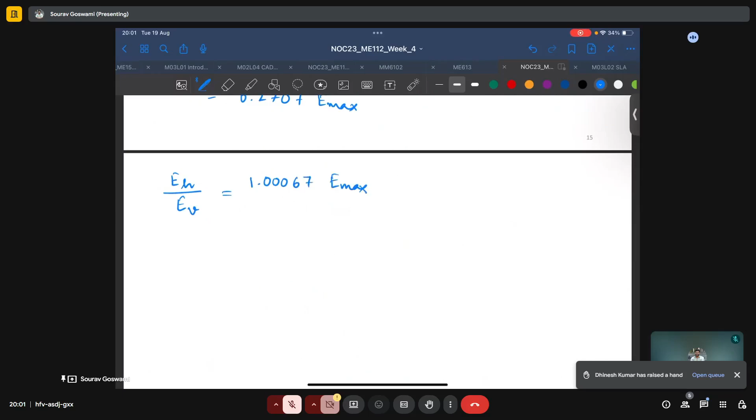We were asked to find the ratio of exposure in the hills and valleys. So we just need to take the ratio. We already have EH and EV. So the ratio of exposures in hills and valleys is equal to 1.00067 Emax by 0.2707 Emax, which is simply equal to 1.00067 by 0.2707, which comes out to be 3.6966.

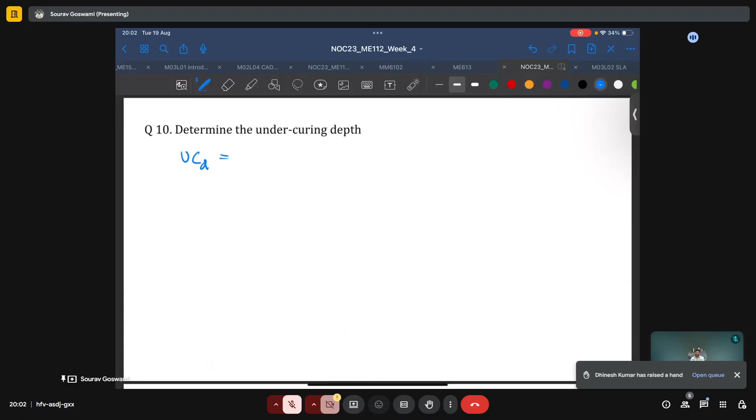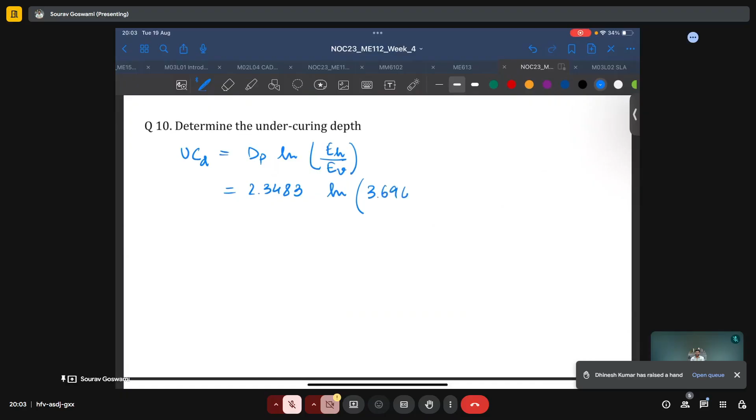In the next question, we are asked to find the undercuring depth. And again, the formula is directly given to us. Undercuring depth is equal to dp ln EH by EV, the ratio of exposure in the hills and valleys. So again, we must make use of a value obtained in the previous step. We already found dp equal to 2.3483 mils. Into ln of EH by EV, which was 3.6966, which is 2.3483 into 1.3074, which comes out to be 3.0702 mils.

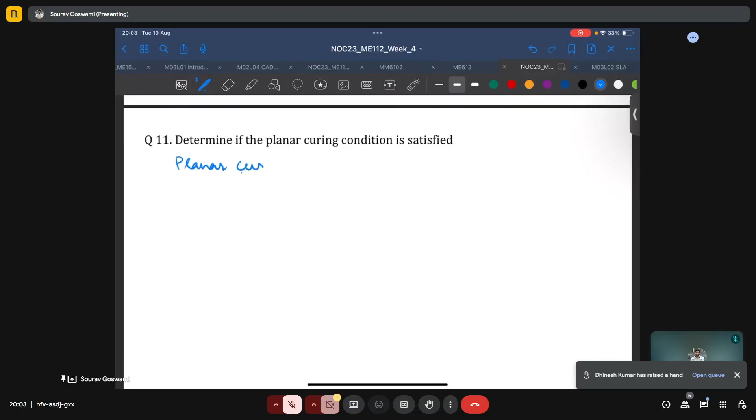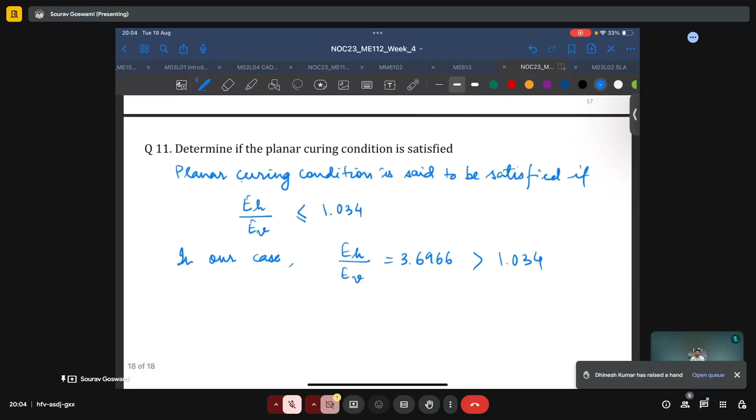And finally, we are asked to check if the planar curing condition is satisfied. For this, let us recollect the planar curing condition. So, planar curing condition is said to be satisfied if the ratio of exposure in the hill to the ratio of exposure in the valley is less than or equal to 1.034. What was the value in our case? In our case, the ratio of exposure in the hill to the valley was equal to 3.6966, which is clearly greater than the critical ratio of 1.034. So, the planar curing condition is not satisfied in this case.

And there was one more question on transverse electromagnetic modes, but I've already exceeded the time for this session, so I'll just close it here today.